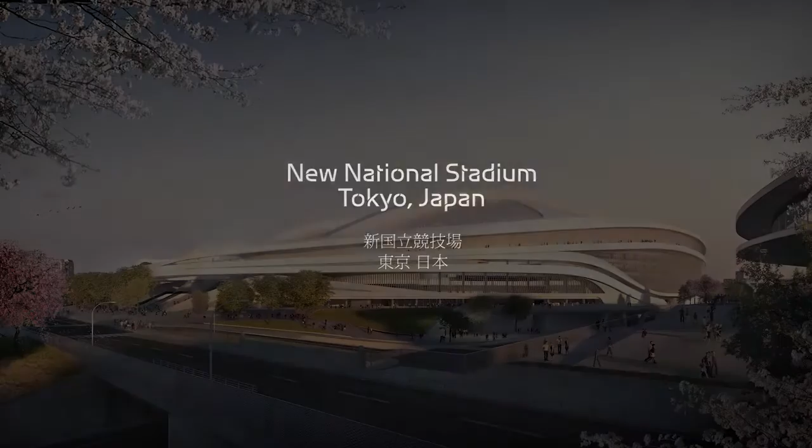One of the first shows we had done was in Japan 30 years ago. Well, I think the stadium project is a very important project for Tokyo because that was done as an international competition, which we won. It was a very serious team of people, of engineers, of architects who looked at this project for 2 or 3 years.

So it's an enormous investment. I think it's a very important project because it has a lot beyond the Olympics. It has a legacy life. The team are a credible mix of international architects with sports planning and Japanese experience.

Zaha Hadid Architects with Arup Sport won the international competition to design the new national stadium for the Tokyo 2020 Olympic Games. ZHA have experience in working successfully with clients to design projects which have been built on time and to budget.

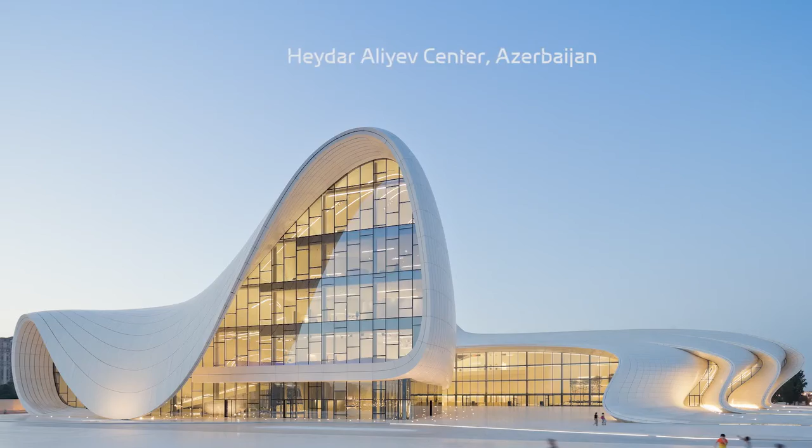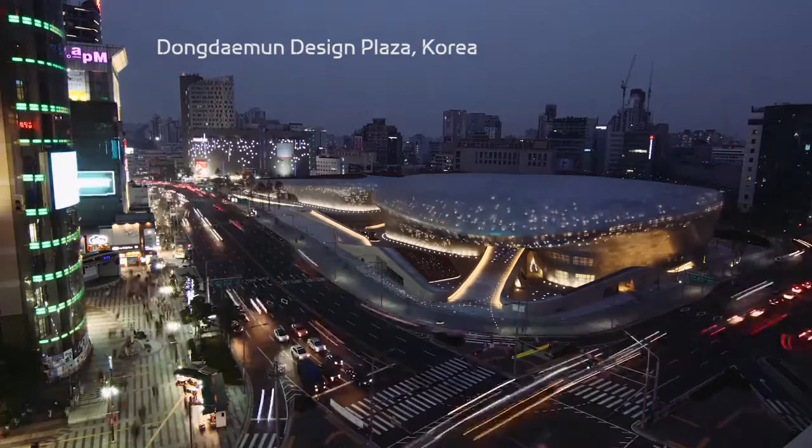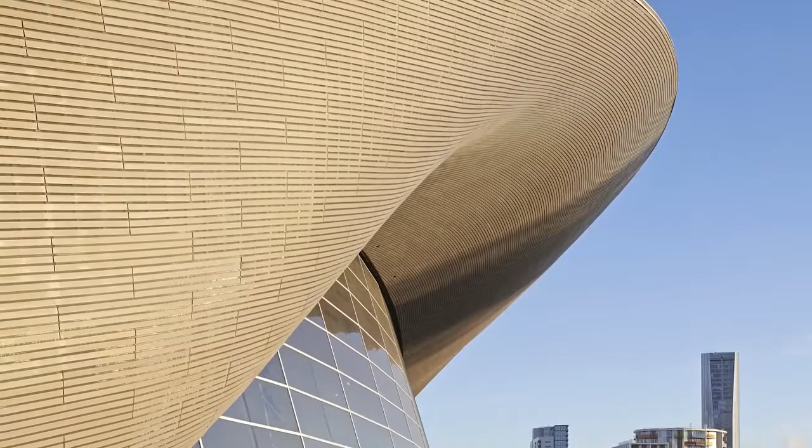ZHA designed the London Aquatic Centre for the London 2012 Olympic Games. The project was successfully redesigned to achieve a revised budget. The design used a mix of temporary and permanent seating to become one of the most successful venues of the London 2012 Olympic Games. The venue has since become very popular and well used by the public.

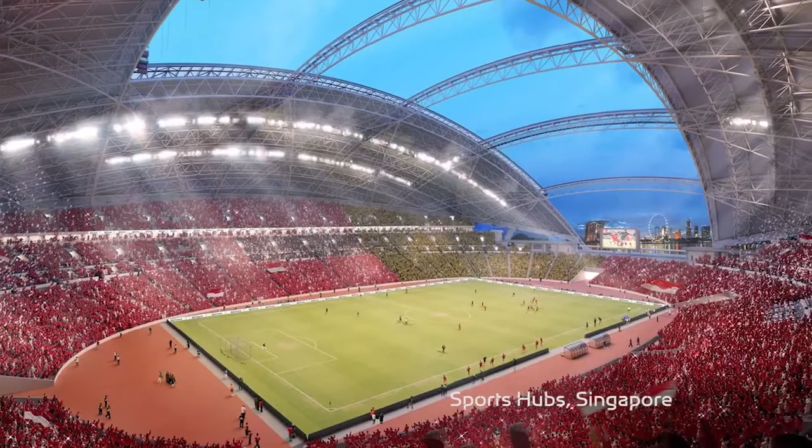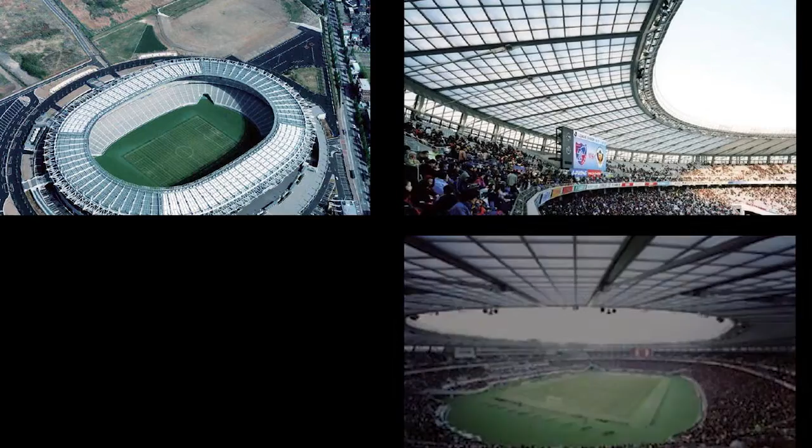Arup Sport have extensive stadium design experience, from the new multi-purpose stadium in Singapore's Sports Hub to the Beijing Olympic Stadium in 2008, the Allianz Arena 2006 and the City of Manchester Stadium 2002. We have been collaborating on the design with 4 of the largest design consultants in Japan, led by Nikken Sekkei. Between them, these Japanese offices have designed 3 of the stadiums for the FIFA 2002 World Cup in Japan.

The design was inspired by the past and future of Japan. The site is the site of the Tokyo 1964 Olympic Stadium, and it's an appropriate place to build a new national stadium which aspires to create a building which exceeds mere function to become a symbol of Japan's renewal and long-term optimism for the future.

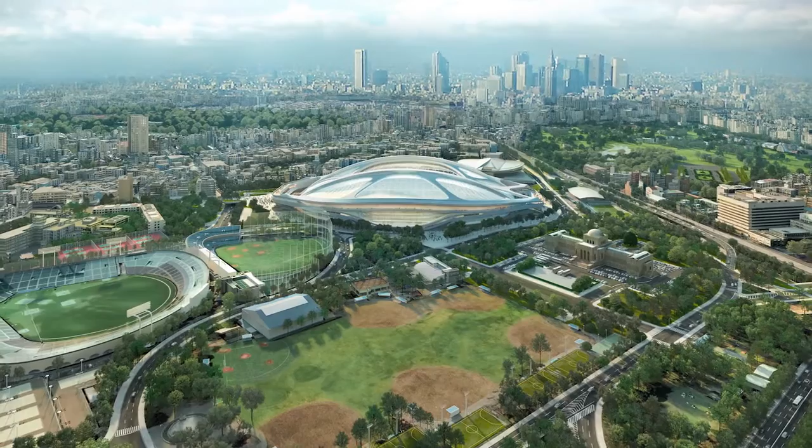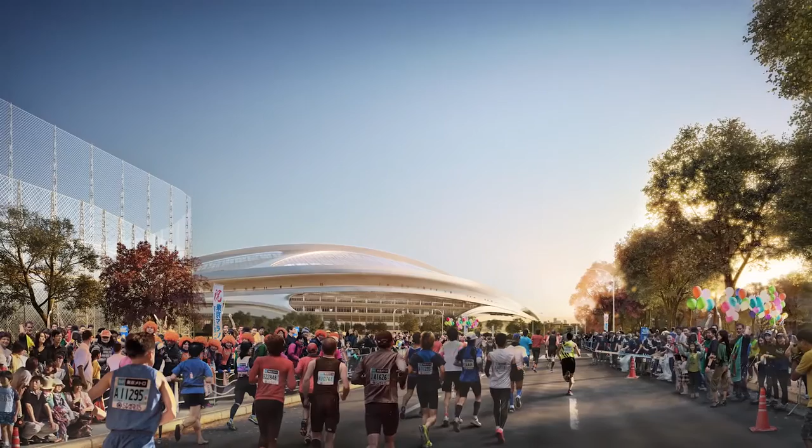The basic components of stadium design are extrapolated to connect the stadium to a specific context of Gaien and beyond to Japanese culture as an expressive but efficient design. The design is derived from the articulation of structure and circulation, where structure is required to create roof cover over long spans without columns, and a lot of circulation is required to safely move 80,000 people in and out of the stadium.

Proposed for practical reasons, the primary structure of 2 keel arches have a similar intent in silhouette and symbolism to traditional Japanese landscape bridges, so that the new stadium is based on a key motif from traditional Japanese landscape design and an appropriate addition to the sports landscape of the Gaien area.

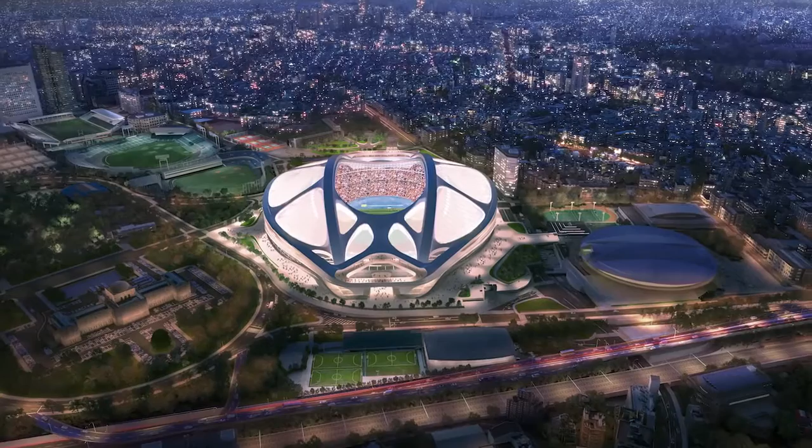With these cross ties, nature is further embodied in the design, where the expressed structure creates a distinctive flower petal geometry, so familiar in nature and to the Japanese public who have a close affinity to nature and the passing of the seasons.

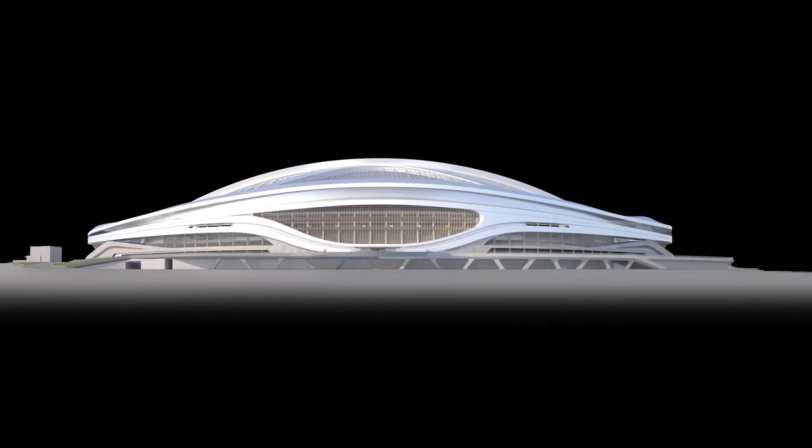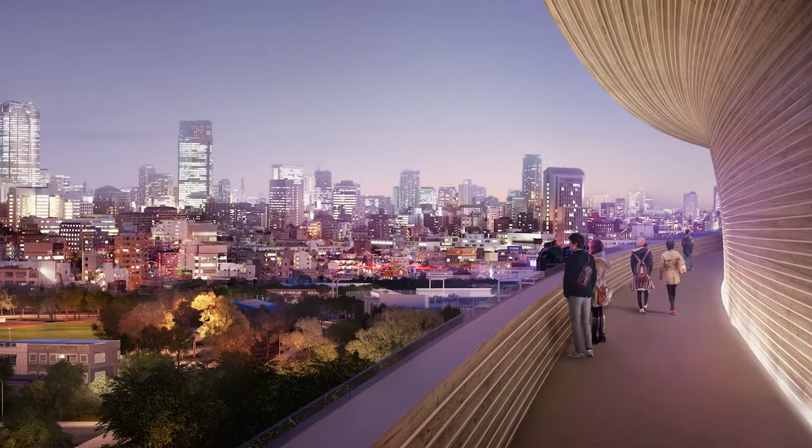The flower petal geometry of the roof is continued into the facade, where the structure is not only expressed but inhabited. A series of diagonal stairways and elevated walkways are developed into an envelope of the stadium so that it functions as a stadium on event days, and every other day it's an extension of the pedestrian landscape of the Gaien area, allowing extended walks and elevated views over Tokyo.

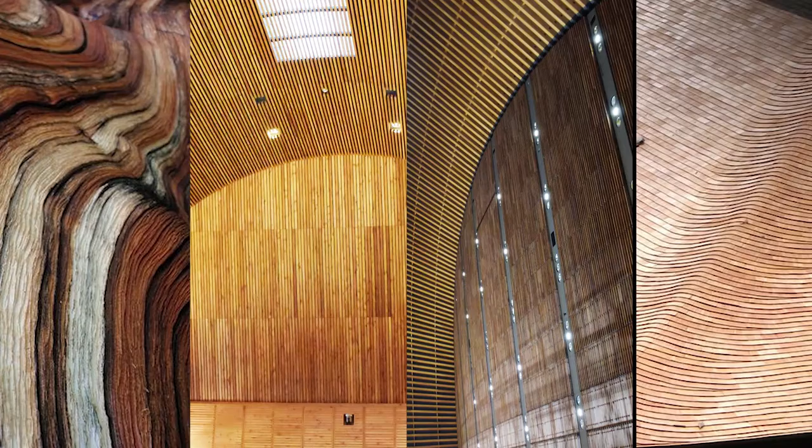All of these public walkways are lined with Japanese timber, giving a tactile familiarity to the stadium, which ties it back to the fundamental material of the Japanese environment and experience. The majority of facade is broken down by the petal geometry and clad in Japanese timber louvers, so that the overall effect at pedestrian level is a subtle interplay of Japanese timber cladding, giving the experience to the visitor of a direct resonance to the tree-lined landscape of Gaien and Japanese culture.

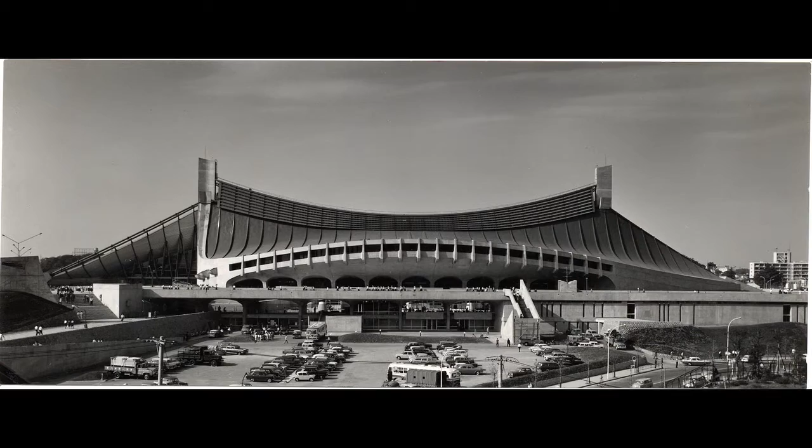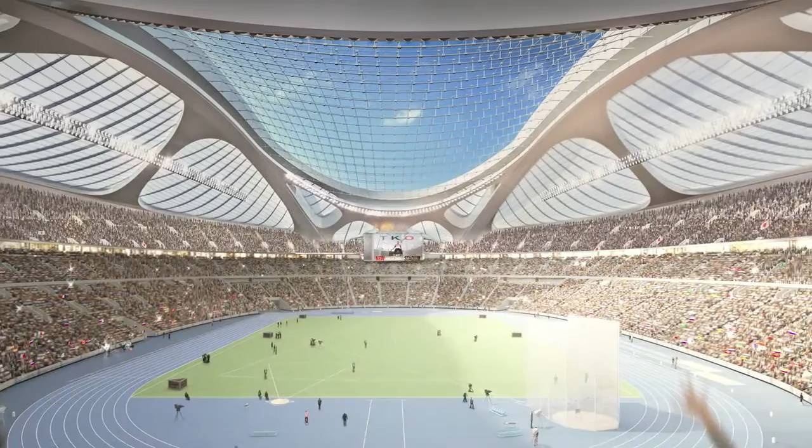The majority of roof structure is provided by catenary beams, which resonate the innovation by Kenzo Tange with his catenary beams for the Yoyogi National Gymnasium. We aspired to make the new stadium connect visually and symbolically with this Japanese icon of optimism, so that Tokyo 2020 leaves Tokyo with a stadium as well conceived and as beautiful as this gymnasium from Tokyo 1964.

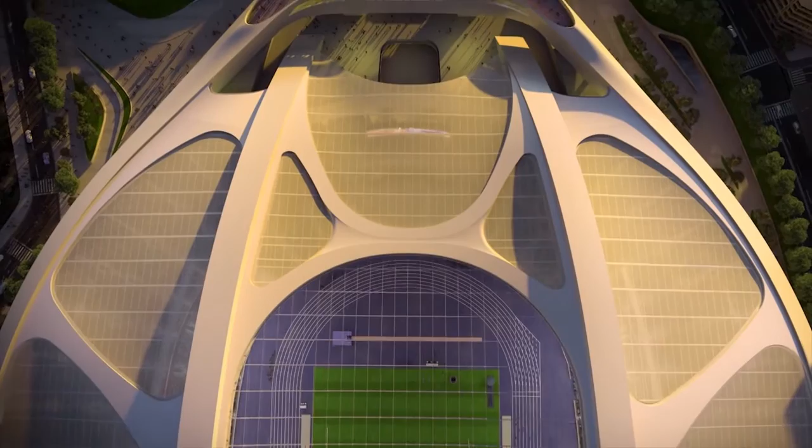The roof is covered in transparent, lightweight fabric. The roof allows daylight in, allowing good turf growth, whilst allowing the spectators to experience the pleasure of daylight as they watch the events. At night, the stadium will glow and take on the appearance of a Japanese lantern.

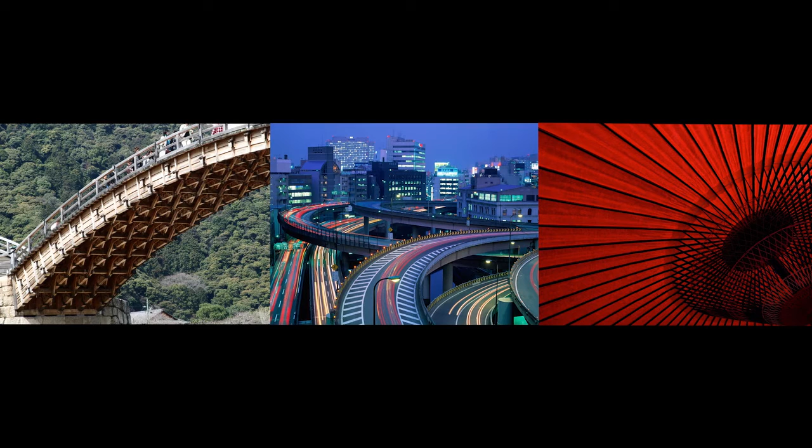Together, the arches, catenary beams and lightweight fabric combine to create an overall effect that represents the traditional craft and modernist innovation of Japan, so that it creates a renewal of the Japanese spirit of optimism for the future based on their confidence of their past.

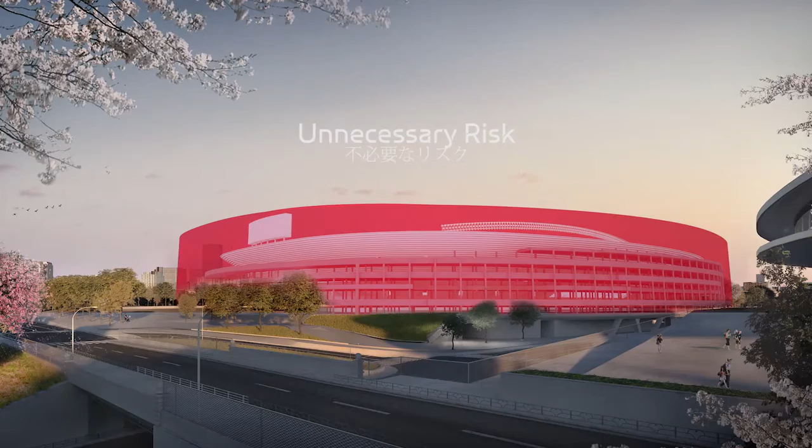Our new national stadium design has been 2 years in the making, and it is ready to start on site this year. It can be ready for the Rugby World Cup of 2019 and the test events before the Summer Olympics of Tokyo 2020. To start the design from scratch is an unnecessary risk which we think the government should reconsider if its aim is to achieve a lower price than 252 billion yen.

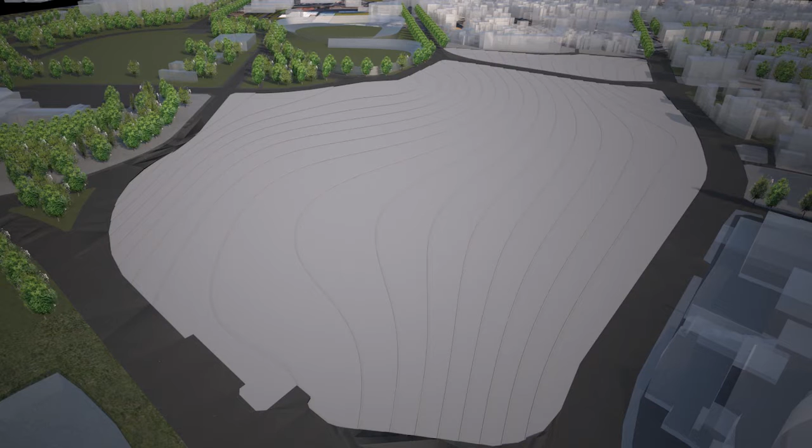We believe the answer is to introduce more competition between the contractors, but to not lose the benefits of the design. The site is complicated and the majority of design will remain valid because the basic requirements of seating capacity and support facilities will remain the same.

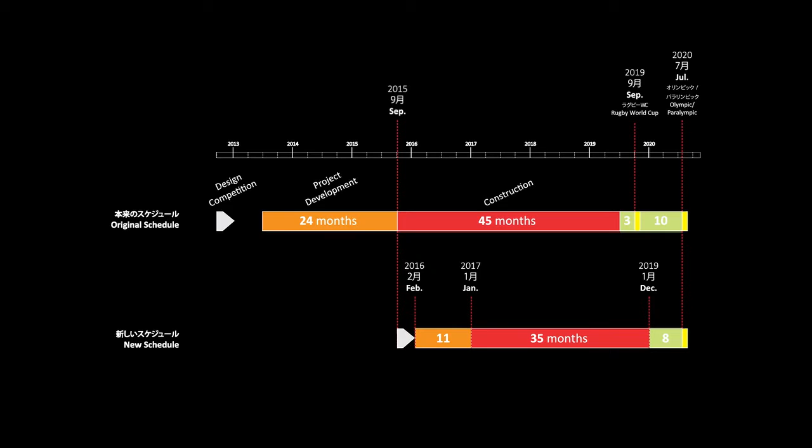A new process should be used to get a lower price, but it should not waste the design work done to date. A new process will only allow a very short design period, and by the time certainty on design and price is determined, it will be too late. Instead, change the current design now to get certainty on costs.

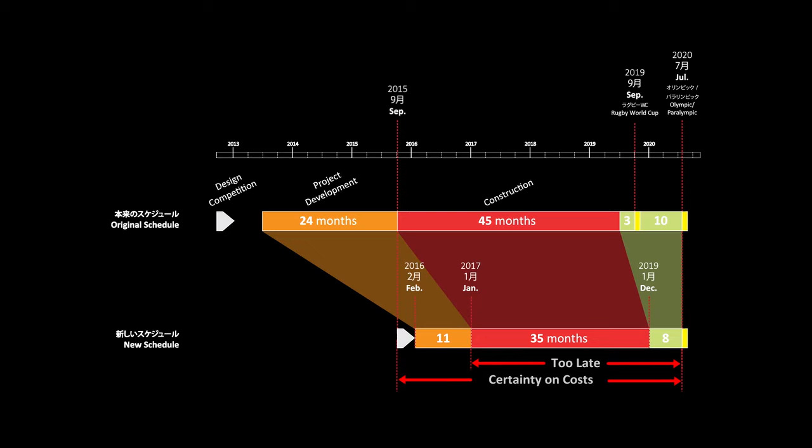A new process to find a contractor will result in the same limited number of Japanese bidders that competed for the project last year. Even if the tender is open to international contractors, only one of the 5 large Japanese contractors will be able to qualify or win the bid. We understand that there are only 5 contractors in Japan who will have the necessary stadium experience and size of turnover to qualify to bid for the project.

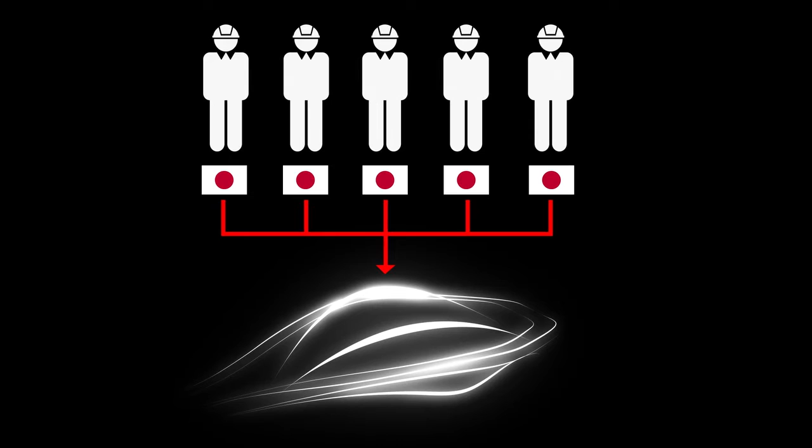2 of these 5 contractors worked on the project and produced the price of 252 billion. There is limited competition available, and this is the underlying issue to be tackled. We think the new process should concentrate on achieving competitive bids based on the existing design with the option to provide cost savings to achieve the project on time and on budget. This way, the design is not wasted and the risk of failure to get value for money is avoided.

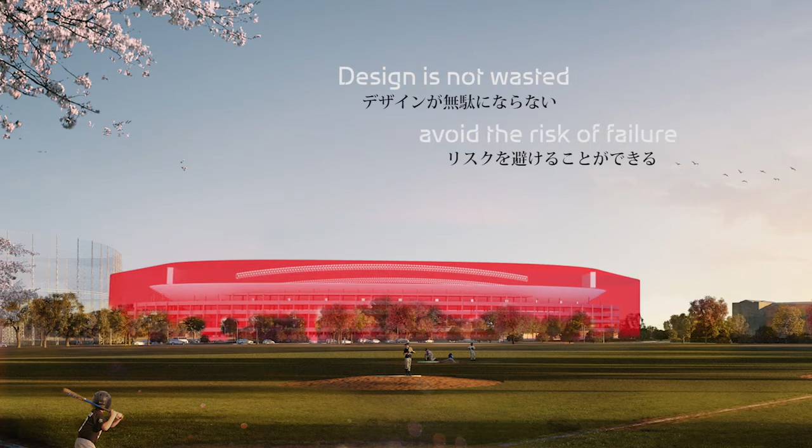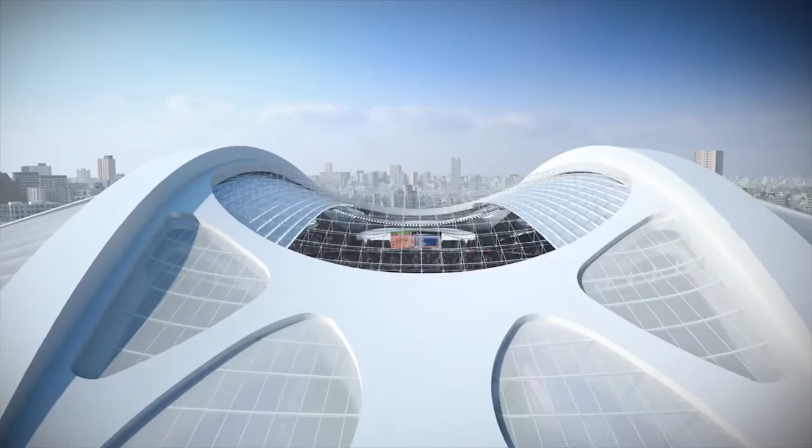The current design is defined by the client's brief, which is an outcome of their legacy business plan, which needs to generate revenue from key stakeholders such as the J-League. For the past 2 years, the client's brief was for a multi-purpose stadium with an adjustable seating bowl which is able to switch sports modes between athletics or football with an operable roof to close the roof opening and allow concerts.

If the government decides to change their brief to a fixed athletic seating bowl of 80,000 seats, it will not be sustainable. If football is watched from the distance of an athletic seating arrangement, it's too far away to create atmosphere and it will not be popular. An athletics formatted bowl is not acceptable to FIFA and will not be acceptable to J-League for national football events. To be sustainable, the investment needs to be focused on long-term usage after the Olympics, and that means being able to accommodate football, which will be the largest user and revenue after the 2020 Games.

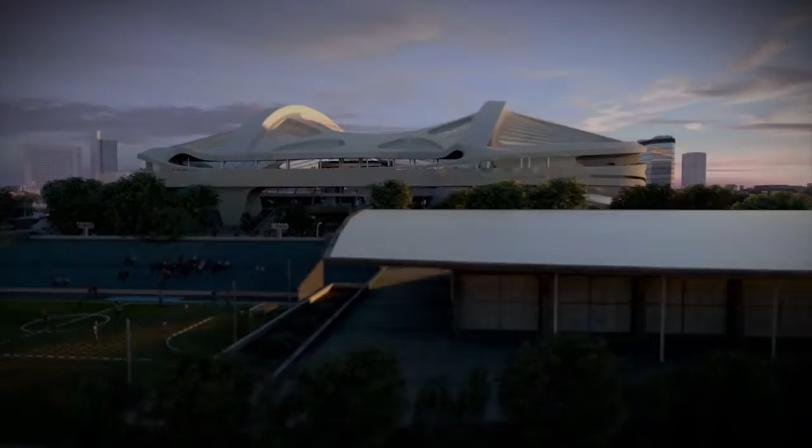There are many options available to achieve this objective, but there are certain key parameters to stadium design which we think need to be understood. To illustrate these parameters, we will use a cross-section of the stadium which encapsulates the basis of stadium design. It's important to understand that the size and volume of stadium enclosure is not only determined by the seating capacity. There are other factors which will need to be incorporated in the new stadium, regardless of its seating capacity. And these factors also determine the size, cost, and sustainability of the stadium.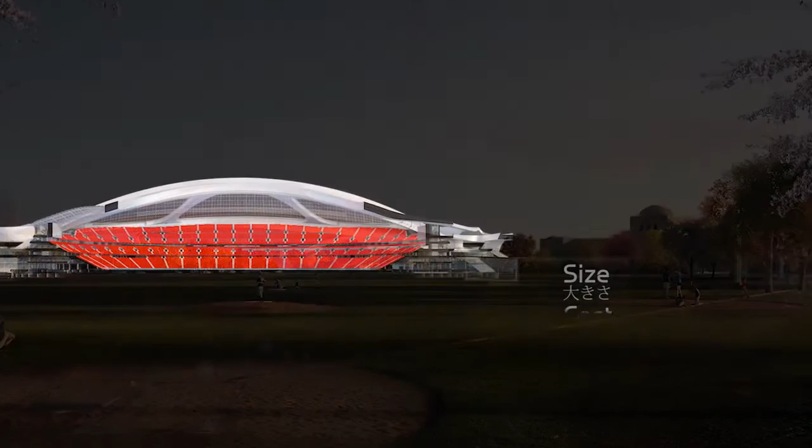To host the Olympic Summer Games, television requires high-definition lighting to be able to broadcast. This requires the stadium to incorporate lighting at a height of 50 meters surrounding the field of play. It's a large field of play with many track and field events occurring in different locations. Each of these events needs to be lit to the same high standard. The lighting also needs to work for football, which is a different and smaller field of play.

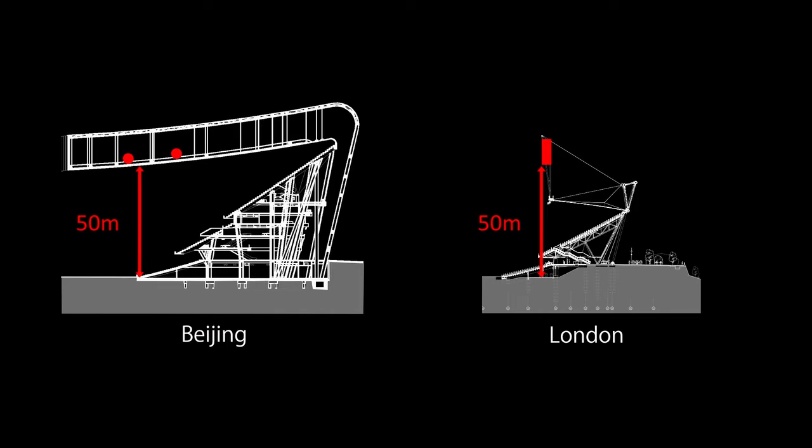This requirement means either above or below the roof, an extensive gantry needs to be built at a height all around the field of play. Regardless of seating capacity, this lighting is required. The extent of roof cover over the seats is directly related to the amount of seats. Its fundamental purpose is to protect spectators from the weather. In the case of Tokyo 2020 Olympic Games, the weather is hot and humid, so the roof should provide as much solar protection as possible to make the spectators comfortable.

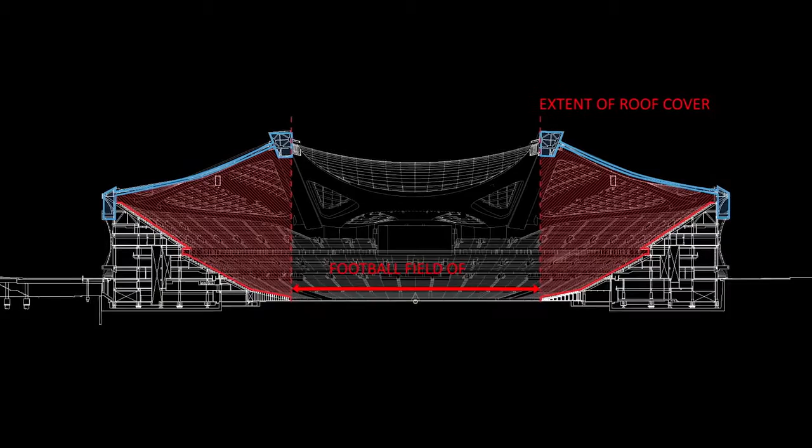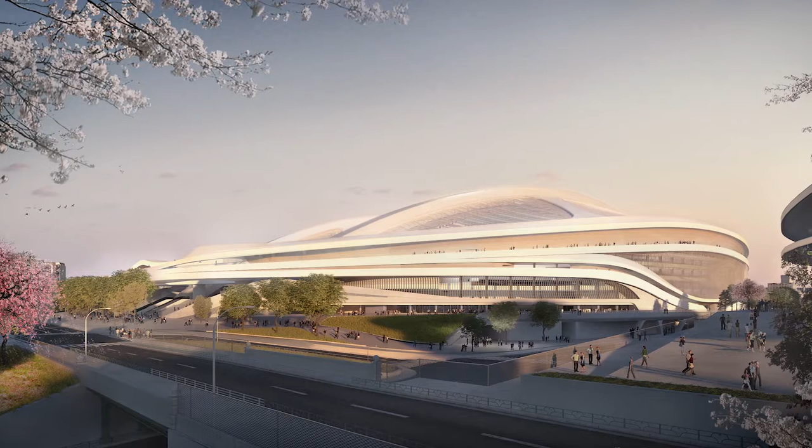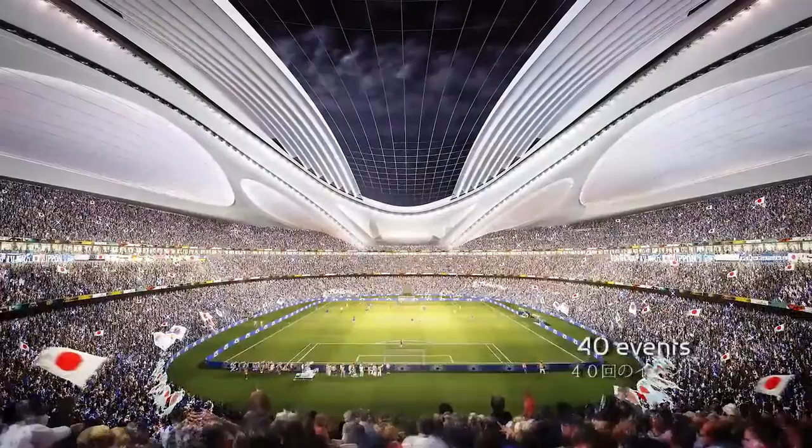If the stadium is to work for football, the extent of roof should be determined to cover all of the seating in football mode. Building a roof once to work for athletics and football will result in the best return on the investment and mean the stadium is sustainable in the long term. Any stadium will host a limited number of events in any year, and stadiums are difficult to make work as a business. For the new national stadium, it was projected it would only host 40 events, including 10 concerts in any given year. There are potentially 80,000 customers at any event, so it's imperative that the stadium design maximizes the amount of revenue that it makes at each of these events.

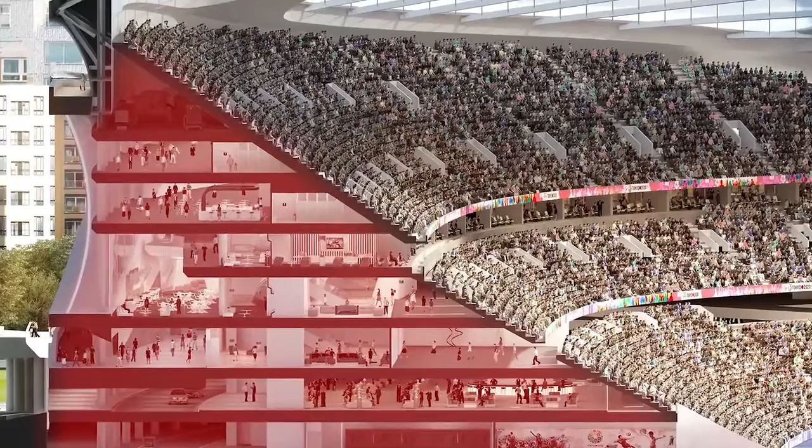In modern stadium design, this means more dining facilities within short travel distances to increase the duration of stay and spend by spectators to any single event. This means that in addition to the fixed seating, there needs to be facilities in close proximity to all seats to ensure revenue is generated. The current design is designed on this basis, and it should be retained to be sustainable not only in terms of usage but also revenue generation.

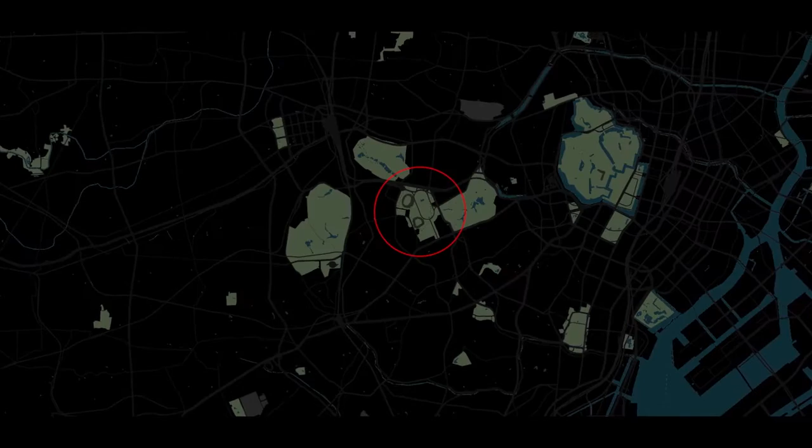The site is a very constrained urban island site, surrounded by roads on all sides with extensive level differences to navigate and height limitations for any development. The complexity of managing to fit the field of play and seating bowl on the site, along with arranging level access in multiple directions, means that there are very few design options available. Our current design is optimized for this particular site.

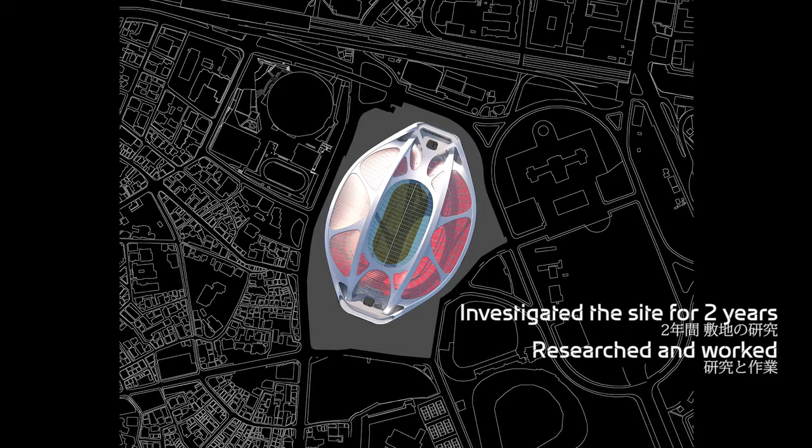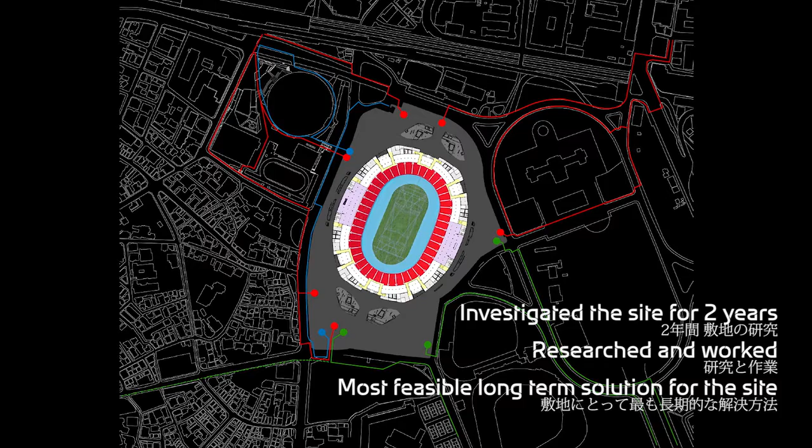Having investigated the site for 2 years, we have researched and worked to produce the most feasible long-term solution for the site. The site area is small, so the design has been optimized to create as much external precinct area available as possible for crowd flows by allowing the non-ticketed concourse inwards to create a compact footprint and safer site for crowd management.

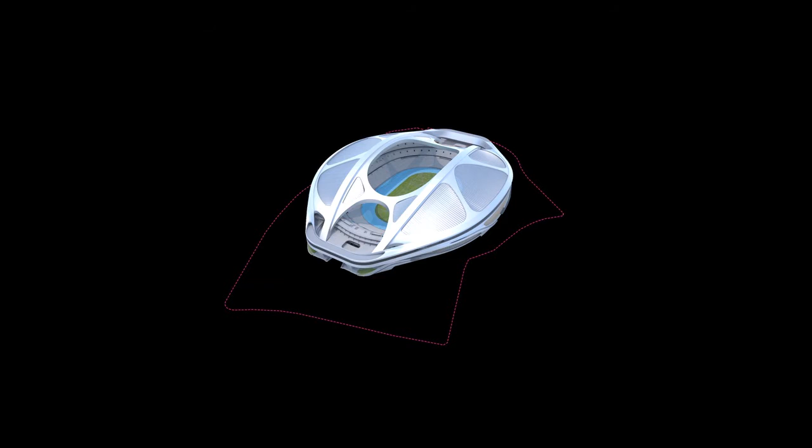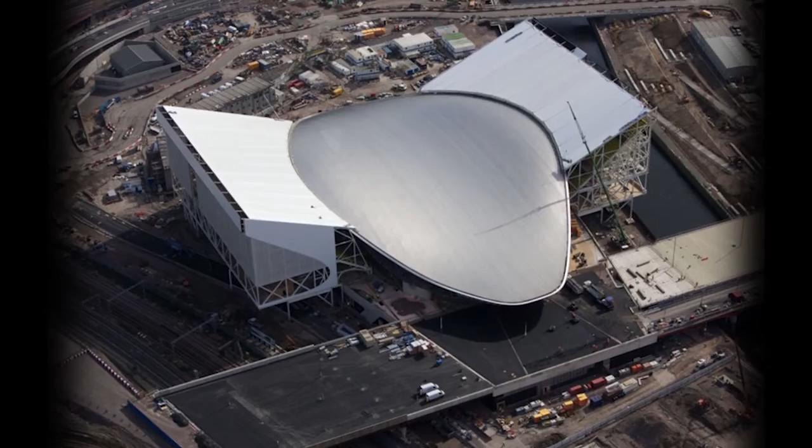We have tested many bowl options, including the use of temporary seating. We proposed an option in 2013 to the client to achieve some of the 80,000 seating capacity by using temporary seats. This option was rejected at the time, as the client's brief was and remained to have 80,000 permanent seats in legacy. We know from direct experience in London 2012 that mixing temporary and permanent seating on a constrained site is difficult, and it is not a way to save costs.

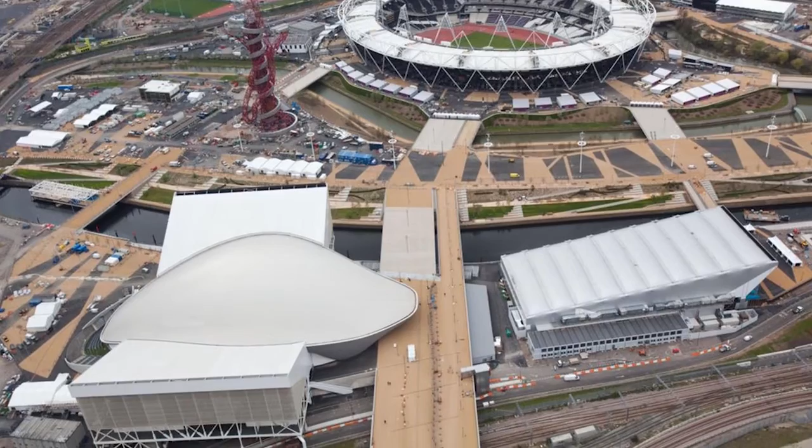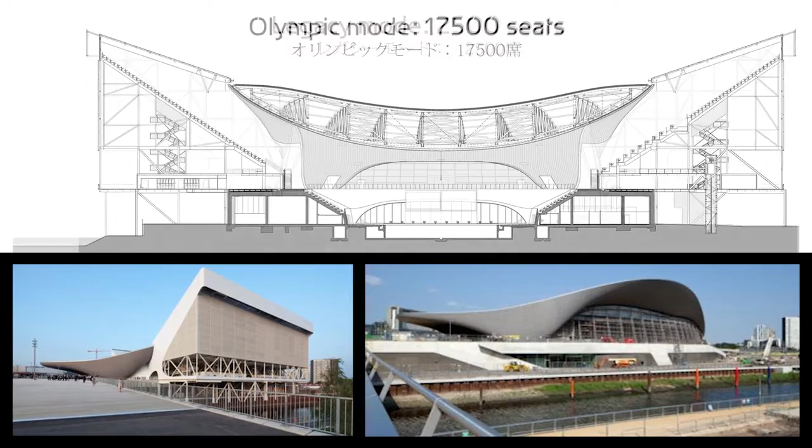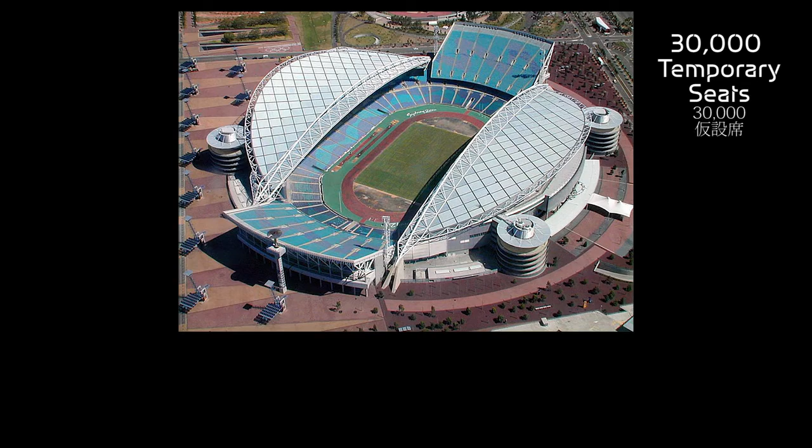It is a valid option if the long-term objective is to achieve a lower permanent seating capacity. This is the reasoning behind the success of the London Aquatic Centre, which was reduced from 17,500 in 2012 to 2,500 after the Games. The Sydney Olympic Stadium used 30,000 temporary seats. Although conceived as temporary, they were built to similar standards as permanent stands to achieve compliance with code. They took a significant percentage of the overall construction budget and took longer than anticipated to convert to the legacy stadium format after the Games.

We should learn from London and previous Olympics on the use of temporary seating. The reasons for choosing this option need to be determined not to save costs or time, but to satisfy the long-term business plan after the Games. The option remains possible with the current design, and the keel arches of the current design are similar to the structure designed for the same purposes in Sydney.

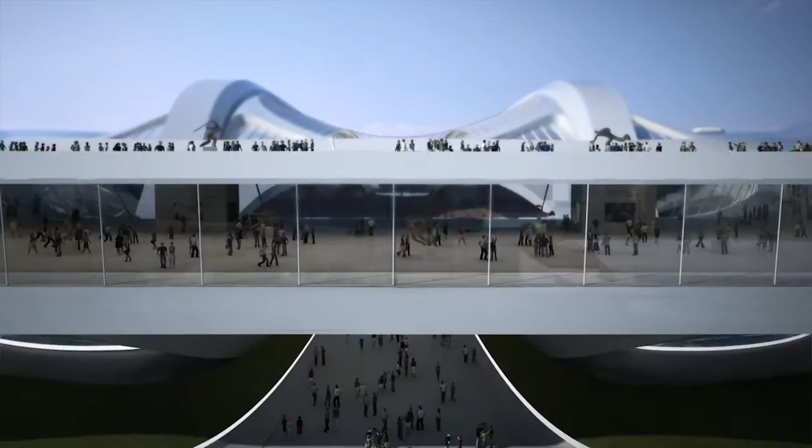We have developed the design to turn the requirements of the brief and site into benefits for the local community, Tokyo, and the nation as its national stadium. To start, and given the constraints of the site in size and height, we have produced the most compact bowl footprint possible for a multi-purpose stadium design.

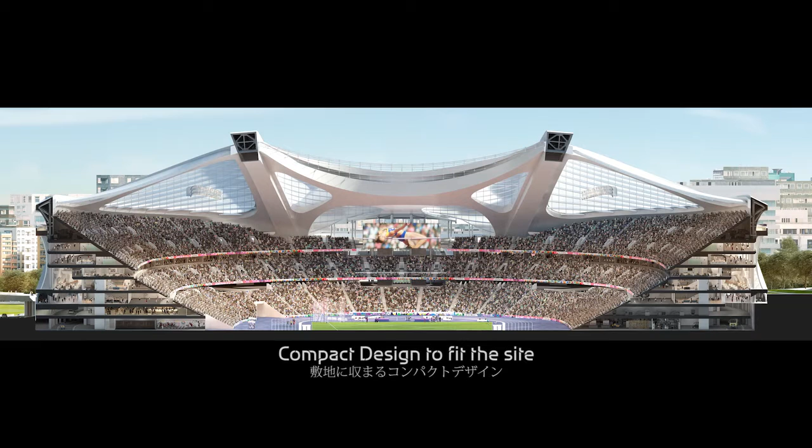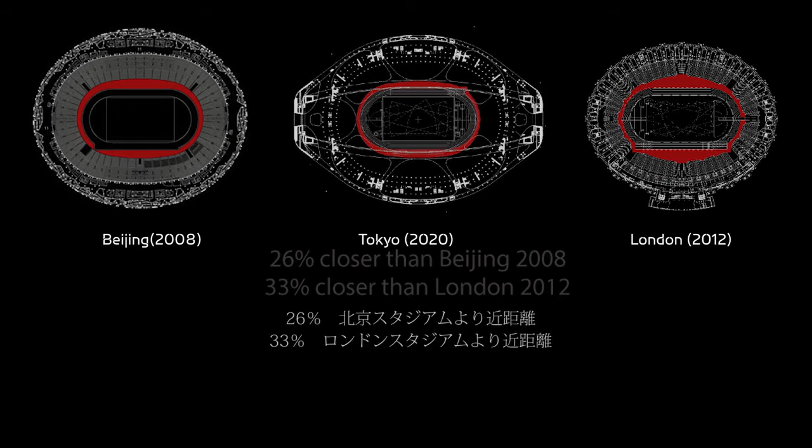Using Arup Sport's experience of previous Olympic stadium design, the design achieves a more compact design to fit the site, allowing more space for safe passage on the precinct, whilst achieving better proximity to the field of play and better quality of view for all spectators by comparison to the previous Olympic stadiums of Beijing in 2008 and London in 2012. The compactness of the design has brought spectators significantly closer to the action in both athletics and football formats and provided them with an enhanced quality of view when compared to London and Beijing. The result is a very efficient, sports-focused stadium design which has been optimized for this specific site.

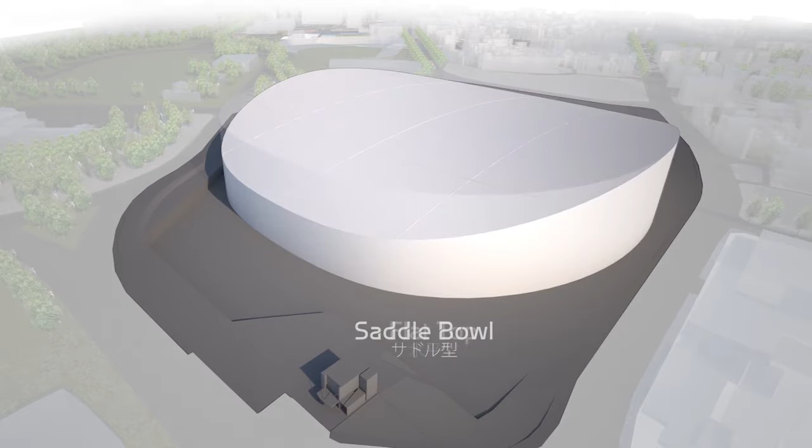We have been aware since our competition submission in 2012 of the sensitivity of the site location with respect to the size of the stadium. This is the reason why we proposed a saddle seating bowl as opposed to a flat-top bowl. A saddle seating bowl is shaped like a saddle, which means it's got a varying height, and its benefits are twofold. The first is that it allows the majority of seats to be positioned in the most popular location along the middle of the field of play and requires fewer seats at the ends. The result is more seats that are easier to sell.

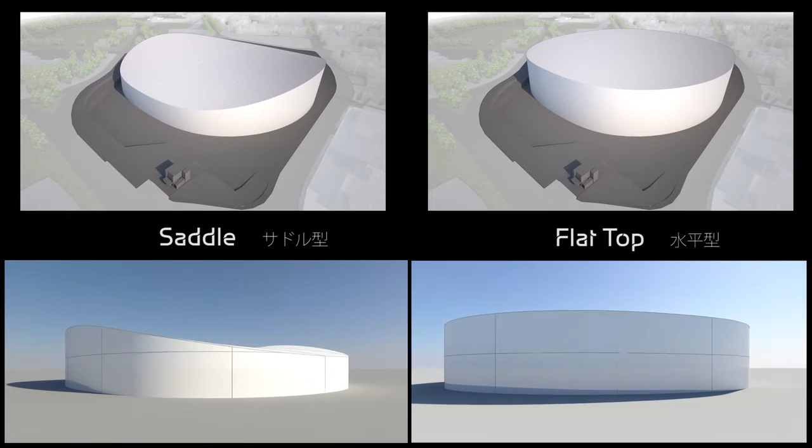The second advantage of the saddle bowl is that externally, the pedestrian perception of the stadium is much reduced, where the inclined elevation of the stadium comes down as low as 24 metres and rises to a height of 44 metres, so that from most viewpoints it will look and feel like it's lower. By comparison, a flat-top bowl will be a constant height of approximately 40 metres, which from all viewpoints will look and feel like a wall 40 metres high.

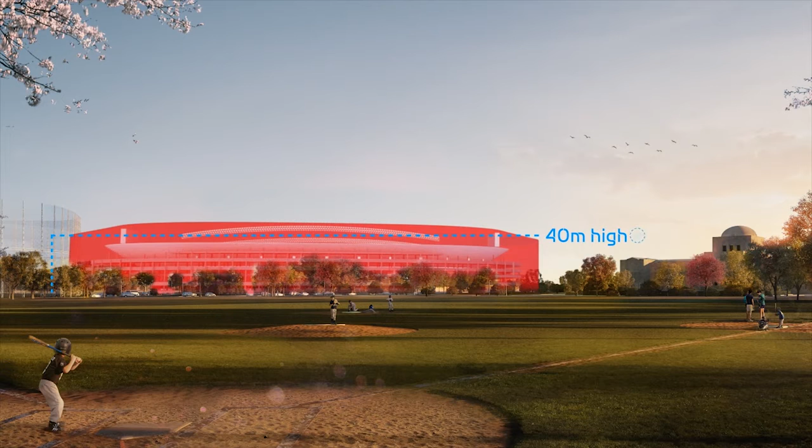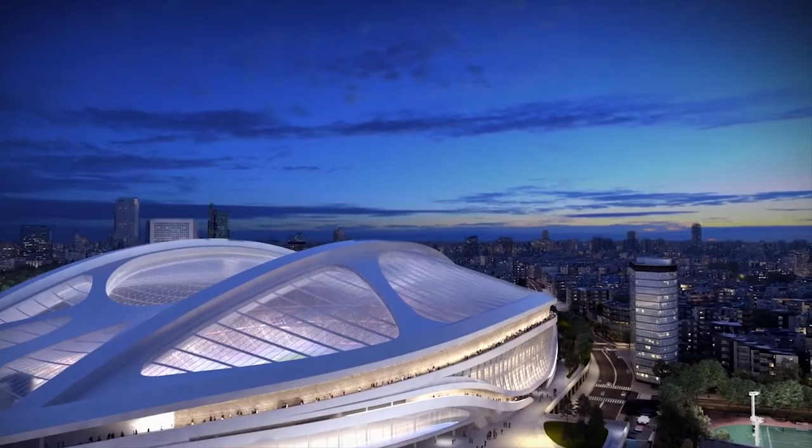The saddle bowl profile allowed the development of a unique additional public feature, the Sky Bridge. This feature of the design is not essential to the stadium functionality, but it's a gift to the public realm of Gaien. The Sky Bridge is an elevated walkway following the saddle bowl profile. It allows a daily usage of the stadium with elevated views, and it connects it into the daily walks or runs of the public in the Gaien area.

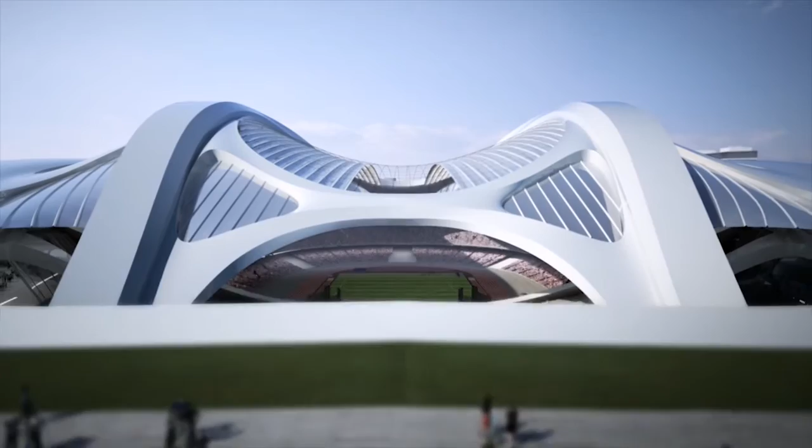The Sky Bridge will be open every day, creating more direct access with the stadium than its event schedule. It was intended to allow the stadium to become a more used part of the city fabric on a daily basis and more integrated into the promenade culture of the Gaien area.

With our experience of previous Olympic deadlines, it was clear that the stadium design should have advantages in saving construction time. We propose keel arches which span the longitudinal direction of the field of play, create column-free views, and rest on the ground. As they rest on the ground, it means that the arches can be built in parallel to the seating below.

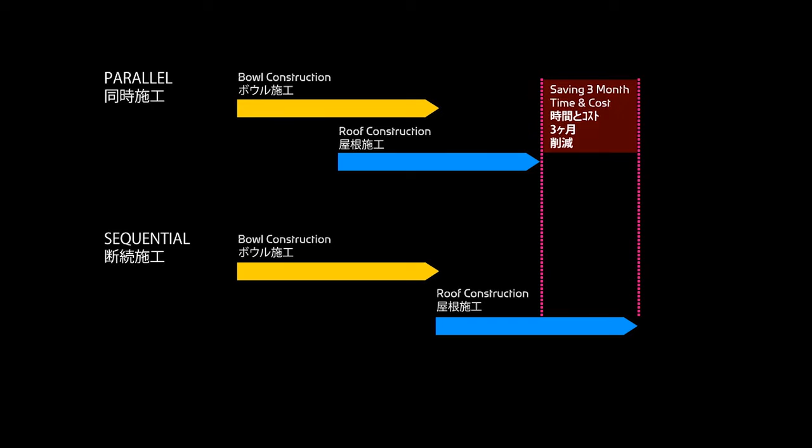We believe this approach will save 3 months in construction time compared to a sequential build of bowl first and then the roof. This time saving will be critical in achieving a fixed deadline, and it will have cost-saving benefits as well.

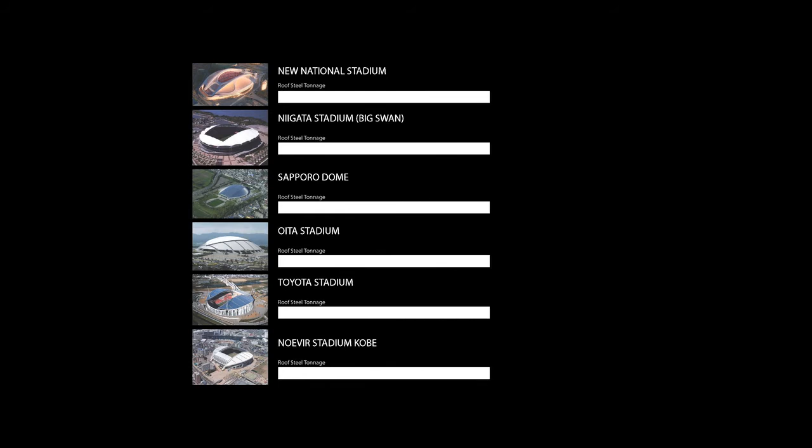This design benefit did not materialize in the joint venture bid, but it remains possible under a new bidding process. The efficiency and cost of the keel arch design is possible to measure by comparing its tonnage to other stadium roof constructions of similar span lengths and seismic conditions as Tokyo. We undertook these studies, and the keel arch is an efficient and cost-effective solution with many benefits.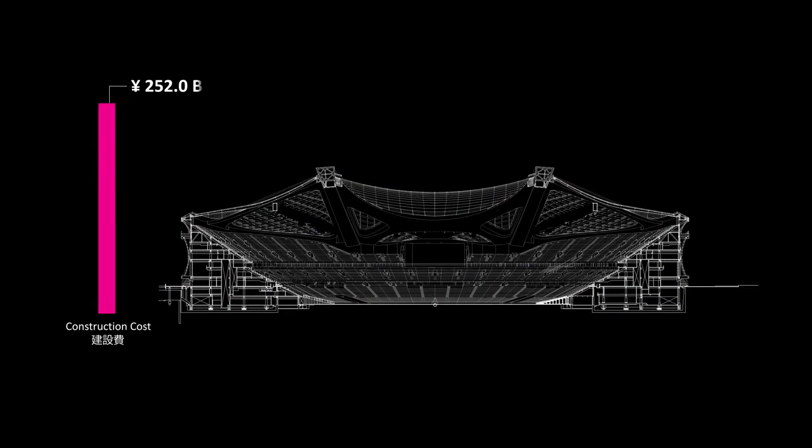Before defining a new budget for the stadium, the current price submitted by the contractors should be better understood. It was not the price of the design as we have described. It was a price based on considerable omissions from that design. The price of 252 billion yen did not include the operable roof, nor the moving seating tiers, and only a partial enclosure of concourses. It was therefore already the market price of a fixed athletic stadium of 80,000 permanent seating.

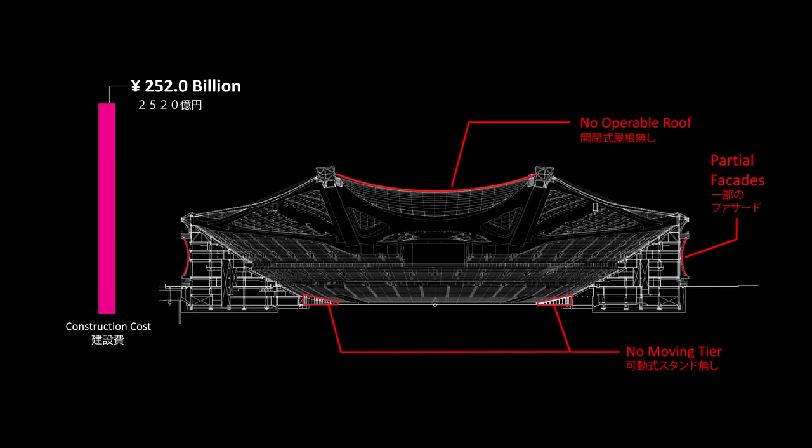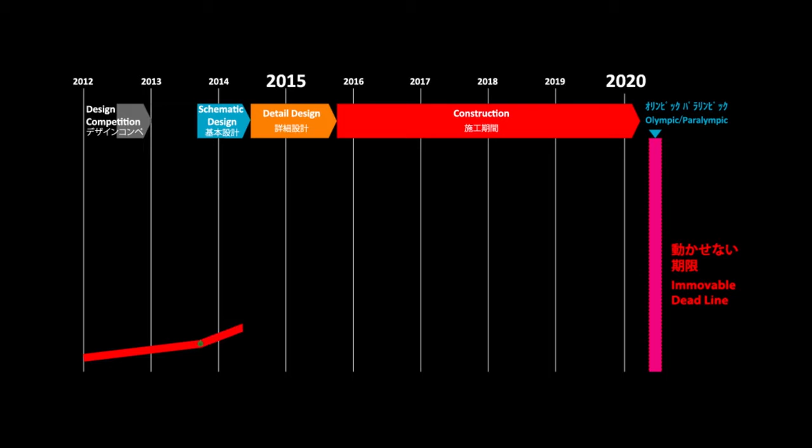Save for the Sky Bridge, 252 billion yen is the current price in Tokyo for a basic 80,000 stadium on that site. A new process needs to change the market conditions in Tokyo, not the design. It should also be understood that immovable deadlines, such as the Olympics, combined with limited competition in the marketplace, create inflated prices. The determining factor in the price is the market and the demand on materials and labor. The design is not the determining factor in these circumstances.

Rather, the design should be seen as the only way to achieve value for money in the market. Without a design as a contractual commitment as much as time and cost, there will be considerable risk to achieving value and return on the investment. The current design can be redesigned to achieve a lower budget, but it should be retained in principle so the Japanese public achieve this value from the market and they get a long-term return on the investment.

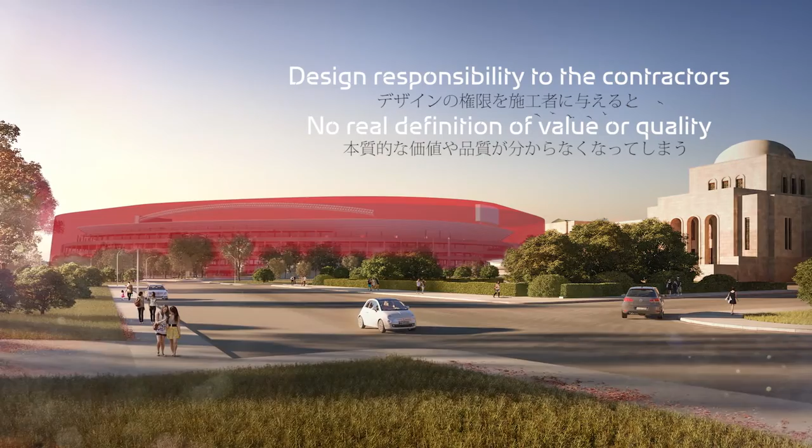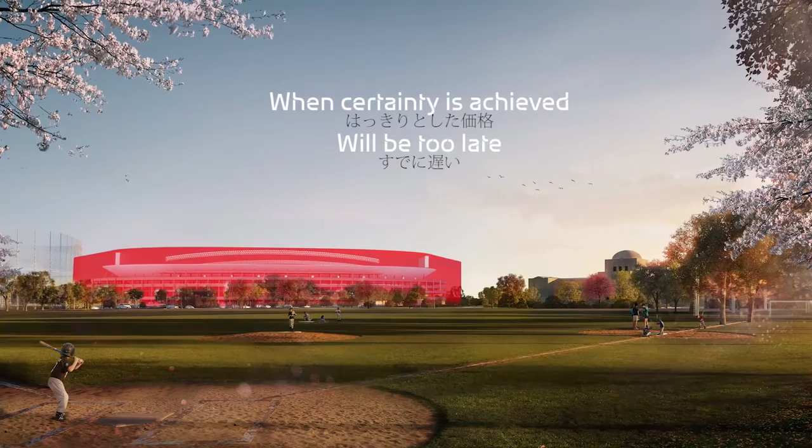Giving the design responsibility to the contractors means that there is no real definition of value or quality except for a price and time schedule. A new concept design submitted with a price cannot be trusted after 5 months of design work. It takes much more time to determine a new design with complete price certainty, and by the time that certainty is achieved, it will be too late. The Japanese public will get less for their money with this approach.

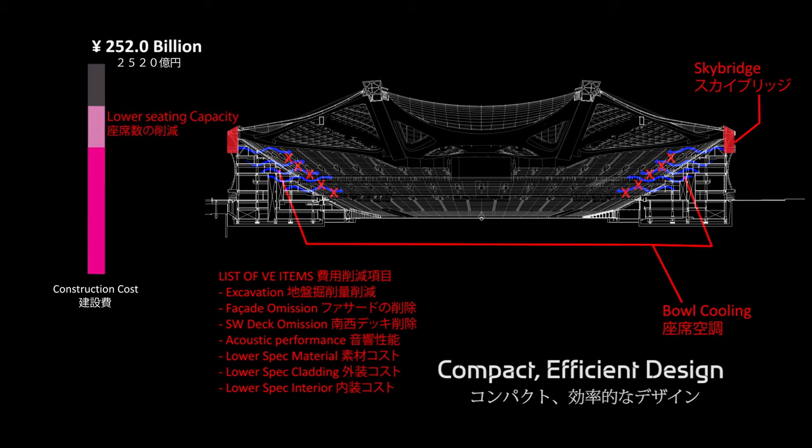So why take the risk? There is a design which will achieve quality, and it can be changed to meet a new budget. Why risk everything when outcomes are so uncertain? Further cost savings can be considered, such as omitting air conditioning for the seating or omitting the sky bridge. But the stadium design is compact and efficient. It cannot be improved upon unless the fundamental criteria of seating capacity alter or a more competitive bidding situation is created to lower the price.

Tokyo should learn from London 2012 and its Olympic Stadium. The London Stadium was design and build. As a comparative cost to the 252 billion yen price for the Tokyo Stadium, it cost 218 billion yen. No one can think that the London Stadium represents value for money. The design is very basic and the operation will be permanently compromised by its conception.

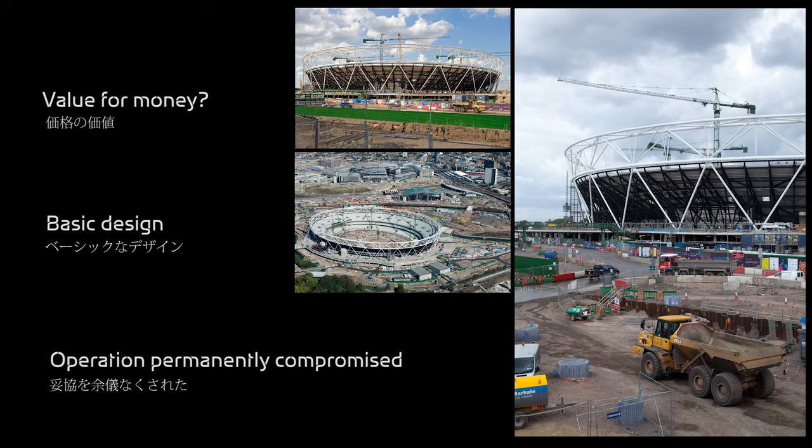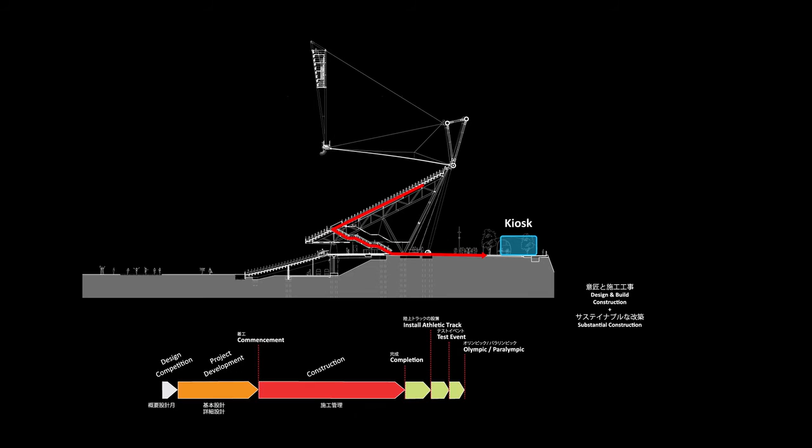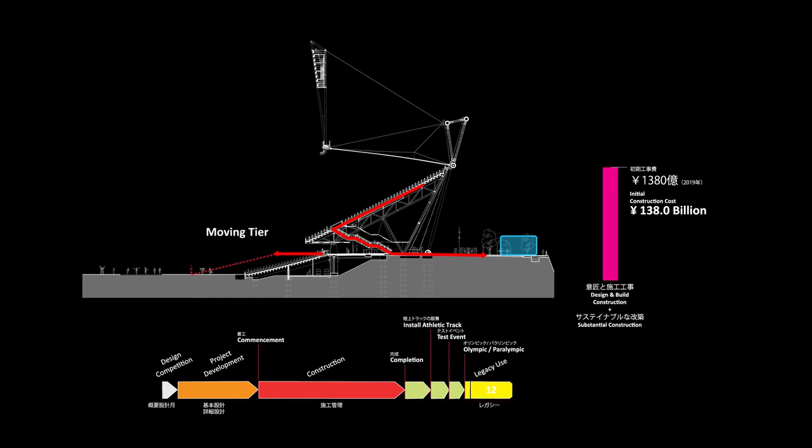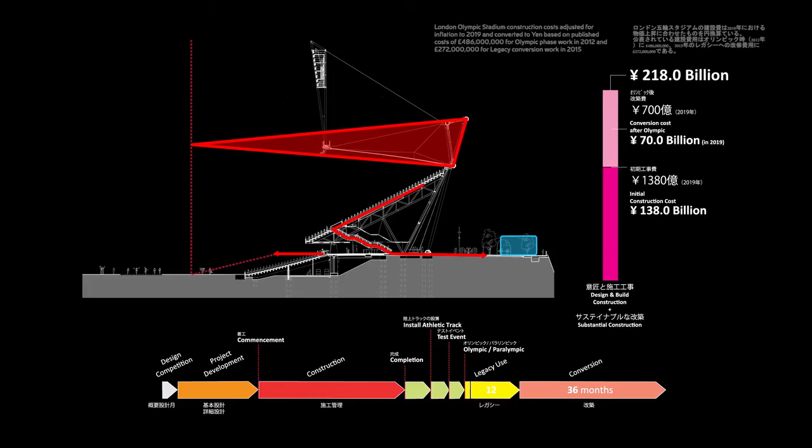And it will remain a compromised stadium, designed only for athletics and adapted retrospectively to accommodate football. In football format, it will never generate the intensity of a true multi-purpose stadium bowl, and the extended travel distances to facilities from the upper tiers will make these seats hard to sell. Tokyo should avoid these mistakes and use the current design to achieve long-term sustainability and value for money from the market by using the design which is efficient and adaptable to change.

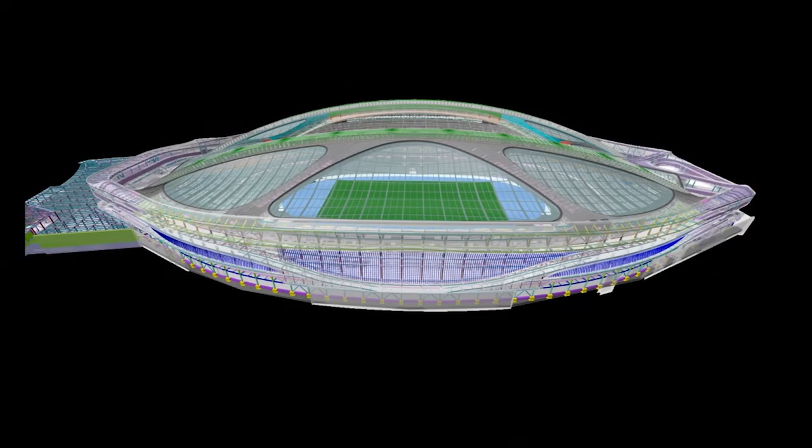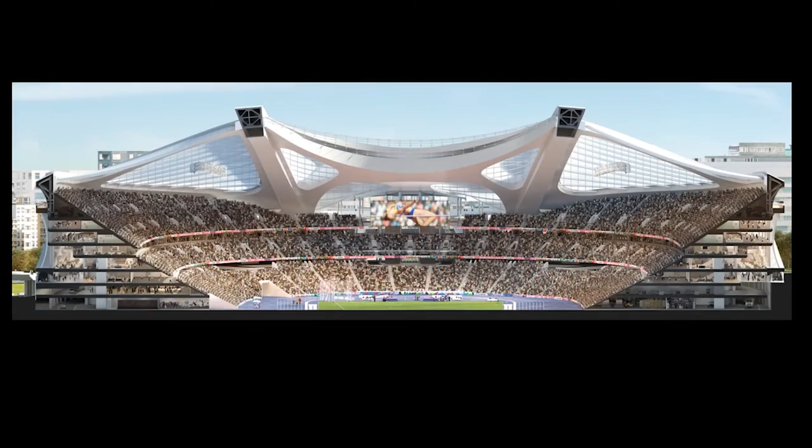We understand the need for the government to undertake a new process to get a better price, but it should not take an unnecessary risk on the design, and it will get more for the taxpayers' money by retaining the current design. It is a unique design which has been thoughtfully developed over 2 years to be not only beautiful, but compact and efficient for this specific and special location in Tokyo. The current design encapsulates all of the lessons learned from our direct experience of other Olympic stadiums. This knowledge and experience should be retained so that Japan gets a stadium fit to be called its national stadium.